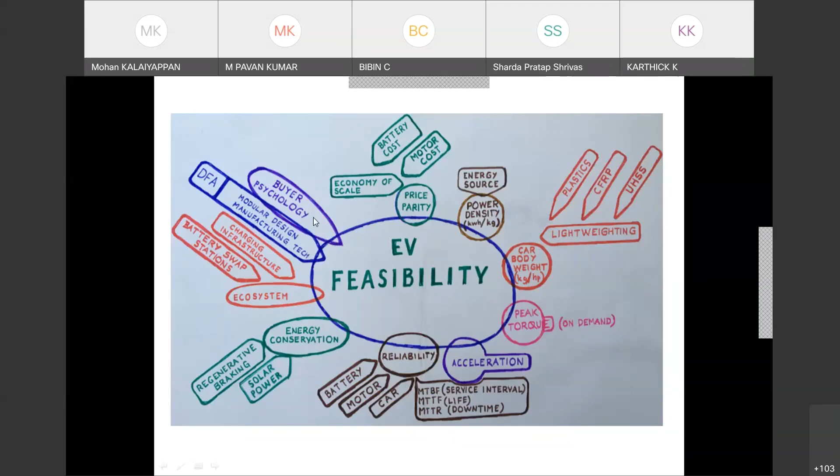Now, the challenges - what are the peculiarities of the Indian market? India is a highly cost-sensitive market, and for a consumer, fuel economy is very important since fuel prices are high throughout the world. Emission and safety norms are set by government, not by the consumer, and consumers generally do not bother about emission or safety.

Another peculiarity is the driving pattern - driving discipline, traffic jams, road conditions, and complex duty cycles. Even city roads have huge potholes and speed breakers. A huge speed breaker means you brake right in front of it, and most electric vehicles, like Reva, struggled to climb over them, sometimes even rolling backwards. This is one reason buyer psychology is still not in favor of electric vehicles.

Environmental conditions involve long sustained abusive usage, and overloading is very prominent and prevalent in India, even for passenger cars, auto rickshaws, and two-wheelers. Quite often two or three people will ride a single two-wheeler. There's also fuel adulteration, lack of standardized road infrastructure, and still no strong local manufacturing base for electric vehicles.

The relevance of technology to India is very important. So we will try to see how Six Sigma and reliability engineering concepts can be applied in developing electric vehicles - like regression modeling, one of the mathematical modeling techniques. It may be zero or one dimensional, but it's easy to understand for beginners.

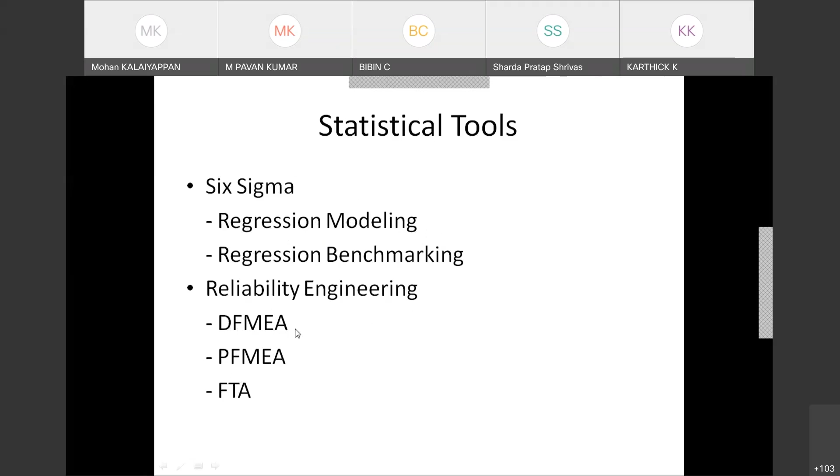We don't want to go into complex differential calculations, matrices, and determinants at a lower level, like that of a faculty member or even a junior faculty. They can easily understand regression modeling because it's just a two-dimensional graph. We'll also cover reliability engineering - DFMEA and PFMEA, that is design failure mode effects analysis and process failure mode effects analysis, and fault tree analysis.

Basically what the buyer aims for is low maintenance cost. Why low maintenance cost? An electric vehicle has very few parts compared to an IC engine vehicle, which gives it very good, very high reliability. Of course there are also fuel cost savings, other economic incentives from the government, and low noise. Now, how does fewer parts mean more reliability?

Suppose you assemble subsystems, electrical or mechanical, purely in series. If you have only 2 parts or blocks in series, the reliability is very high. Here component reliability is on the x-axis, and the ultimate system reliability, considering input to output in series, is shown - here it is 0.8 with just 2 components.

If you've got 20 parts, each subsystem with the same input reliability level of say 0.9, it comes down to less than 0.1. 0.1 is the reliability, that is complete car reliability, complete electrical subsystem reliability. It has got 20 parts in series for electrical or mechanical. This graph is both for electrical and mechanical. So there are 20 parts like gear, motor, belt, transmission, clutch, brake, final wheel. If it has got 20 elements each with 0.9 reliability, the overall drivetrain reliability, mechanical reliability comes to 0.1.

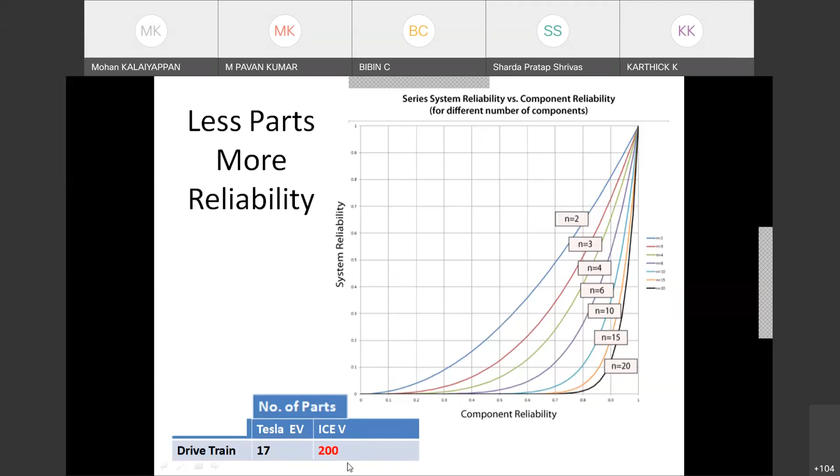So for the drivetrain, they're saying Tesla has got 17 parts. An IC engine vehicle of comparable capacity has got 200 parts. And that is why you combine, you consolidate parts, down to some 5-6 parts.

If you reduce the number of parts, the reliability of the system goes up. This is called parts consolidation. Mix all the elements and make it like a single replaceable part.

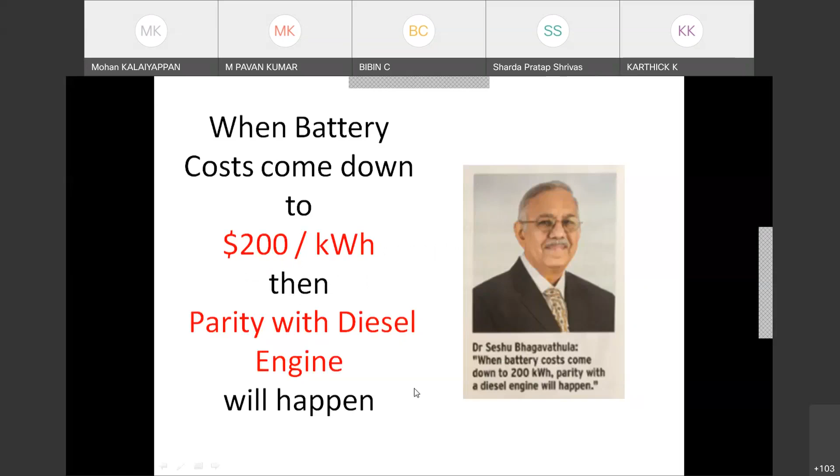Mission critical parameters are very critical. Key success parameter: some national experts, like Seshu Bhagavathula, say $200 per kilowatt hour is the benchmark. Battery cost should come down below that, then only people will be tempted to buy electric vehicles instead of diesel engines. Another expert from the government joint venture Energy Efficiency Services Limited, under Ministry of Power, Mr. N. Mohan, says when battery costs come down to $160 per kilowatt hour for a bike and $190 for a bus, then only those electric vehicles will become favorable and people will start buying.

So we'll go into what is a project definition. The project definition basically starts with the project charter, defining what your problem is. Whether you want to make some electric vehicle to run around your institute campus, or whether you are designing something for a commercial customer outside in a collaborative mode along with the R&D of that company like Tata Motors, Leyland, Hyundai, or Maruti. First of all, you have to select whether you want to make a two-wheeler, three-wheeler, or four-wheeler. So let us assume you have zeroed in on a four-wheeler.

So you have to write a spec book. That specification book is the first part of the project: product definition, pricing, and component subsystems, and availability of those subsystems in India. You cannot make all the systems by yourselves, you may have to buy a lot of things from others. So product benchmarking is very important, we will share all the slides. You compare the competitors' vehicles, go for regression benchmarking. Supposing you want to copy some imported design, that's possible, but it is subject to intellectual property rights infringement.

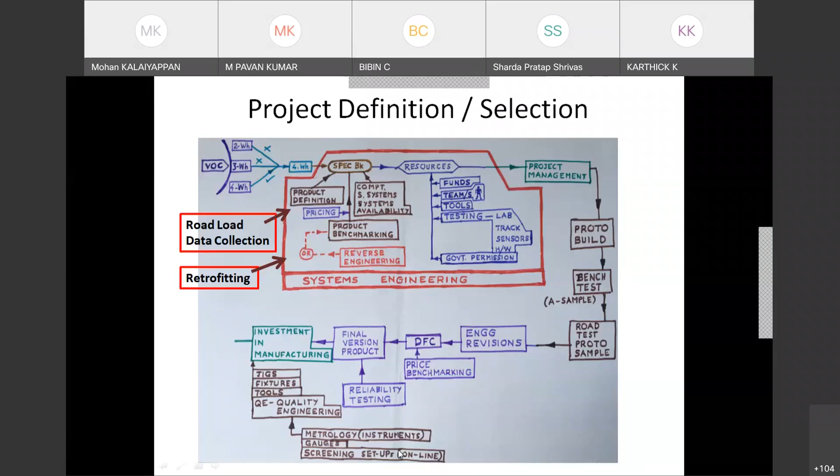And the price benchmarking is done here as an additional design for cost. And final version of the product, investment in manufacturing like jigs and fixtures, tools, quality engineering, that is metrology, gauges, screening setups, that is online screening tests. So we go through waterfall.

And benchmarking. Benchmarking basically is collecting data from competition, market data. You can benchmark against some equivalent IC engine also, equivalent IC engine of the same kilowatt or horsepower capacity. And prototype building, testing, engineering revisions, product release, feedback, incorporation. We have already discussed that.

Okay, so first of all, you collect the user requirements like market survey, urban drive cycle data collection. That is, basically you fit some load sensors and vibration sensors, collect the data. If you cannot collect the data, you can buy the data by paying to organizations like ARAI. If you say that I want Mumbai or Pune drive duty cycle, they will give you, but at a price.

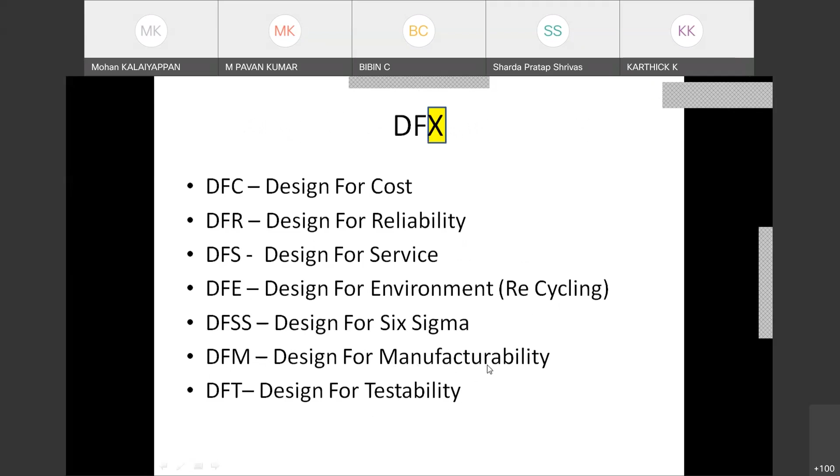Okay, so what is the connection between APQP and systems engineering? APQP, as you all know, maybe you might have been exposed to QS 9000. It's also known as IATF, all these things, AIAG, VDA, there's a German Automotive Industry Association. There is nothing but the parallel of systems engineering followed by entities like NASA, Boeing, Airbus, Honeywell, Raytheon.

So like fault tree analysis. Basically, it's a quantitative approach. We will be following design failure mode effects analysis, which is a qualitative approach. In fault tree analysis, insufficient fuel in a car, they say that AND and OR gates, fuel used at 0.2 probability and no fuel from tank at 0.02 probability. Ultimately, it works out to insufficient fuel will happen 0.032 out of 1, that is 3%. 3% of the times insufficient fuel can happen. This is normally fault tree analysis used as a post-accident or post-event analysis, not useful as a DFMEA.

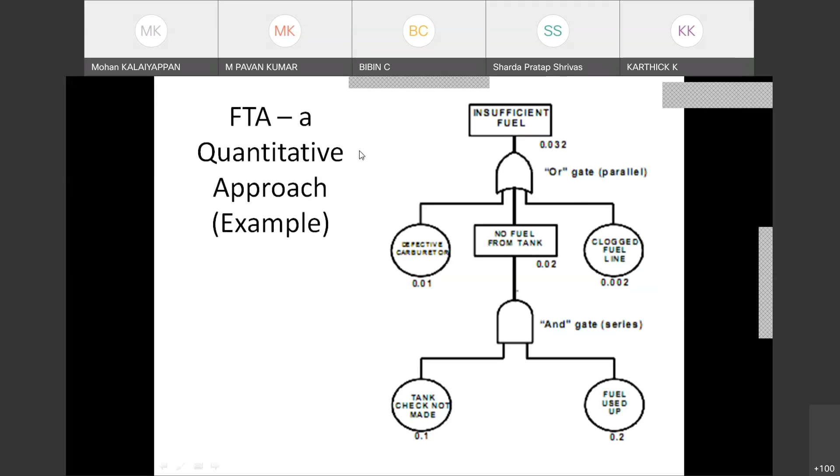So it happened in the Boeing 787 Dreamliner - a lithium-ion battery supplied by GS Yuasa, Japan, really exploded in mid-flight. They grounded all the aircraft and did a fault tree analysis.

Suppose you are a lithium-ion battery manufacturer - this GS Yuasa case applies to automotive companies also. They could learn from the failure of the aircraft application. There was insufficient cooling while discharging, it got overheated, and then it blew up. They learned from that failure.

Boeing 787 Dreamliner GS Yuasa battery failure - this is what I mentioned. They predicted 1 in 10 million flight hours for one failure, but actually 2 episodes happened in 52,000 flight hours. So they had to ground everything. This is the problem - even in the US, when they calculate reliability, they made such a serious mistake.

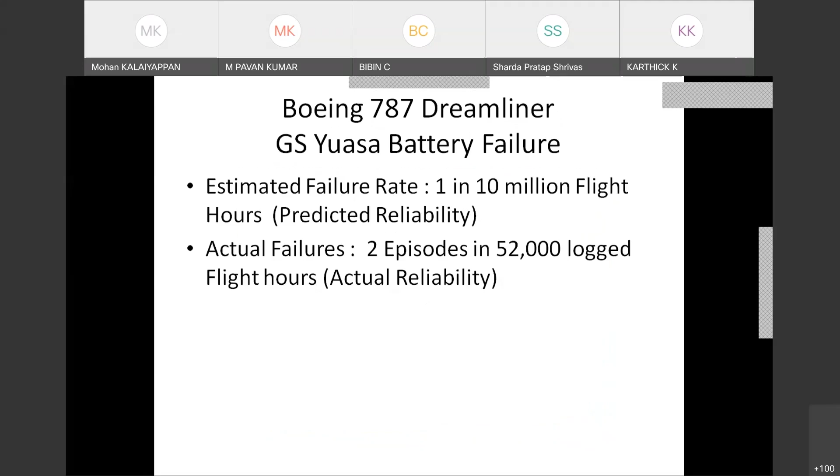Design for reliability happens at various stages - concept phase, design phase, development phase. You have FMEA here, fault tree analysis will come here, and somewhere here as failure analysis. FTA is one of the failure analysis methods, and various other things are there. Each stage has to give feedback to the previous stage - that is how it slowly builds into a good product.

Fault tree analysis versus FMEA - as I said, FTA is a post-accident investigation, while FMEA is done before the product design. So FMEA is called proactive, preemptive, and preventive.

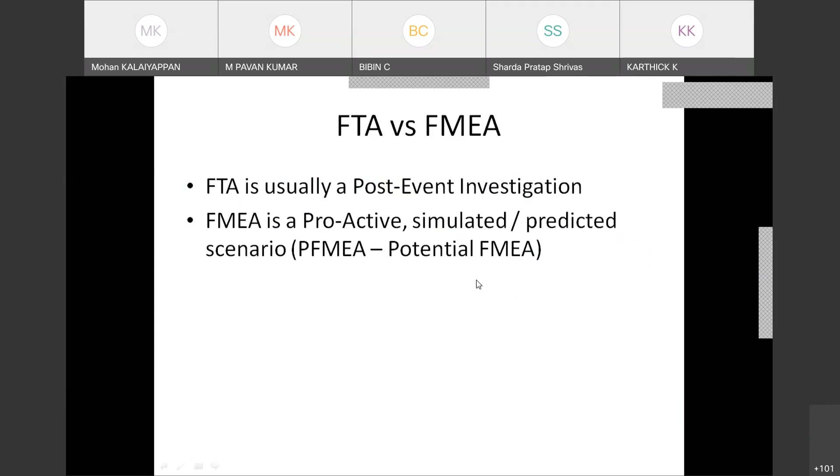Systems engineering approach - we're showing an example from AVL Germany, a subsystem manufacturer. It worked along with another company to manufacture a range-extended electric vehicle. Basically it's an electric car with a range extender like this, using a Wankel engine, which is an IC engine, running on methanol or some fuel.

I'll see the details in the later specification sheet. It's not on a crankshaft, it's a straight drive shaft. This engine runs the generator, and there is a battery pack here - used for range extension. This is the range extender concept they decided on, and they made some prototype vehicles; it is now mass produced.

For that they used the waterfall diagram - I think we're all familiar with the V-type model: target definition, concept, powertrain design, component design. At each stage, feedback flows back to the left side - system level, component level, and then back to system level again.

Yesterday we talked about 0D, then going into 1D, 2D, then coming back again to 0D and all that. So: component test, realization, implementation, component test, powertrain test, in-vehicle test, and fleet test. We'll have to do it like that.

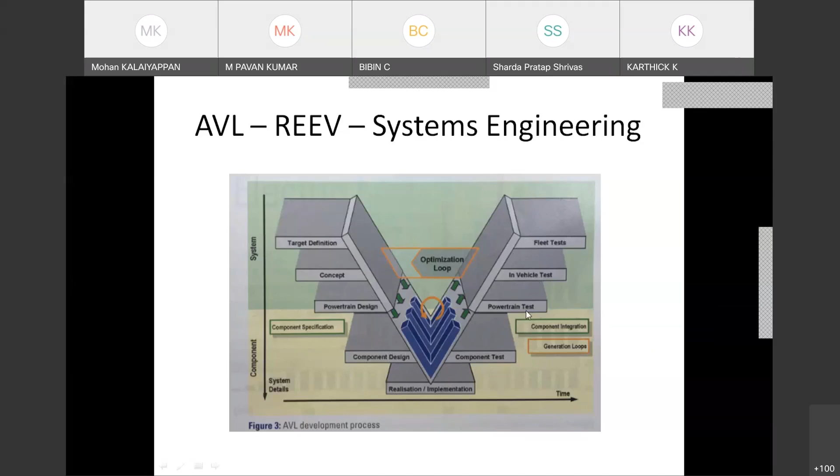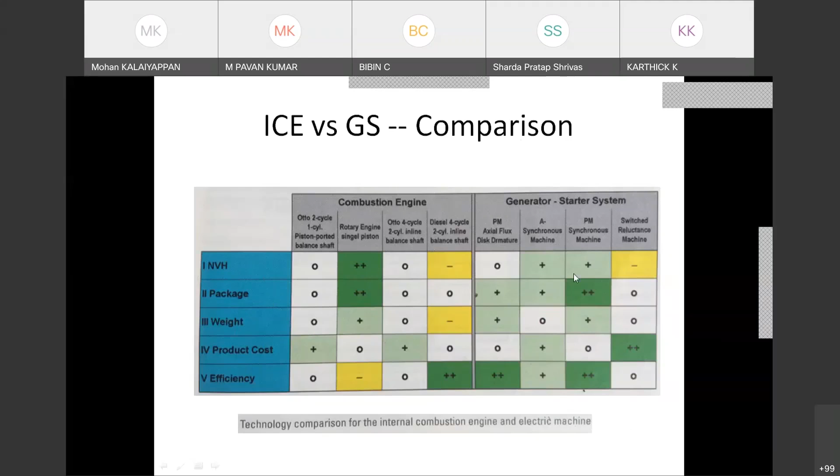They also compared the internal combustion engine and generator starter - they call it a generator starter system, with an NVH package and so on. They found ultimately that this kind of configuration is good - that is, the permanent magnet synchronous machine. This is how they collected statistical data.

How many persons did they collect data from? A lot of citizens, the driving public. They collected it and found it's a truncated normal distribution. They found that more than 70% of vehicles do not exceed 50 kilometers per day of travel - that is, per day the vehicle doesn't travel beyond 50 kilometers for more than 70% of the time.

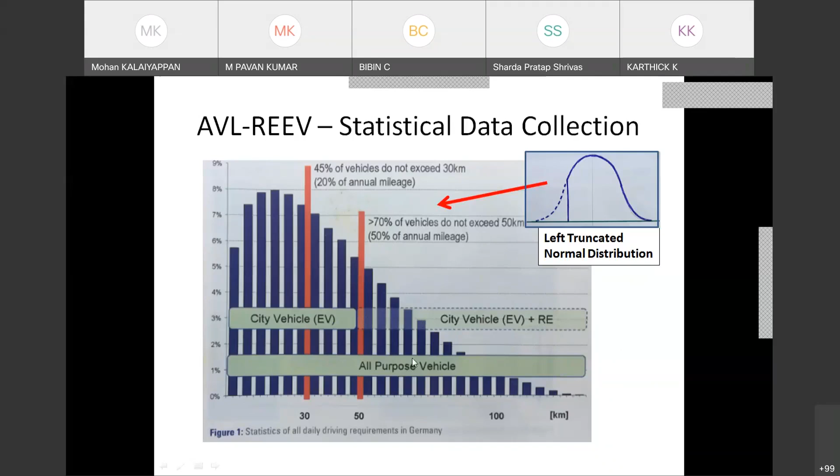Maybe for the whole year, so many specimens - persons, human beings - were sampled and analyzed. This is one of the very interesting applications of starting from statistical methodology rather than from any feelings or experts' inputs. So for city vehicles, an electric vehicle beyond 50 kilometers should use a range extender - very nicely they concluded this.

So for city drive, you'll have to collect this data - I think these are available from European governments who give the cycle itself. They collected statistical data and are saying that any electric vehicle should follow this. SAE also has given a standard driving cycle - accelerate, cruise, decelerate, stop for some time, and so on.

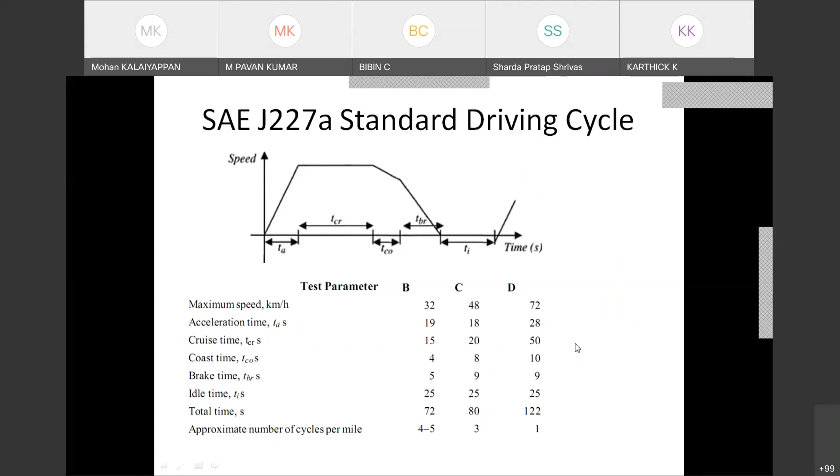City, non-city, various variable route, urban, variable route, suburban, like ABC, so many things are available. What is BCD and all is here. Yeah, BCD, there is no A here, there are BCD.

You can see all that leisurely, they have taken a government bus, city bus, traveling through Florence city, I think it's in Italy. They have collected GPS data, and at each point, what was the bus doing, what was the acceleration, deceleration.

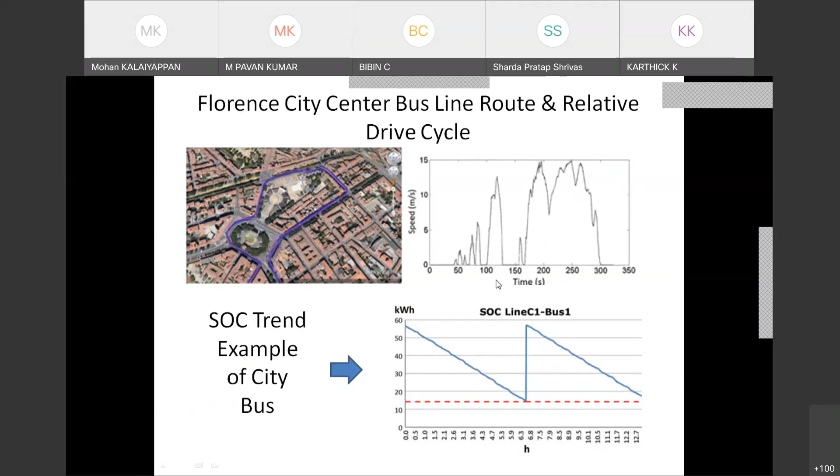State of charge trend, they correlated perfectly, and this is how they go about. There is a data logger in the vehicle itself. It is used in a Canadian city. Daily utilization, running, bulk charge, opportunity charge. Opportunity charge is something different. When it is actually idling, waiting for passengers, it is able to generate through inductive charging or something, it's called opportunity charge. This was made by Mitsubishi i-MiEV. It's a car.

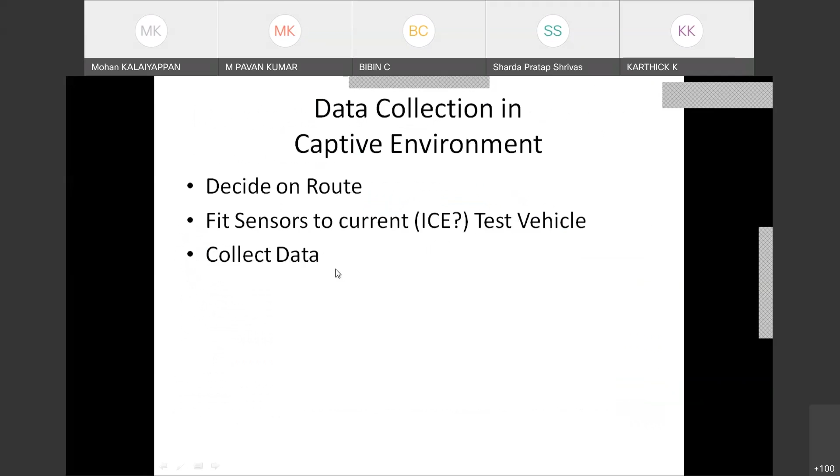Okay, so decide on the route and fit sensors on current IC engine vehicles. Basically, you can collect the load, shock data, vibration. For an IC engine vehicle, maybe it can collect data if you decide to use your campus road internally. Also, you can do that, and basically you collect range, mean speed, torque, what is the torque requirement. There are torque sensors available, torque data also can be collected. Stop, start cycles, all that.

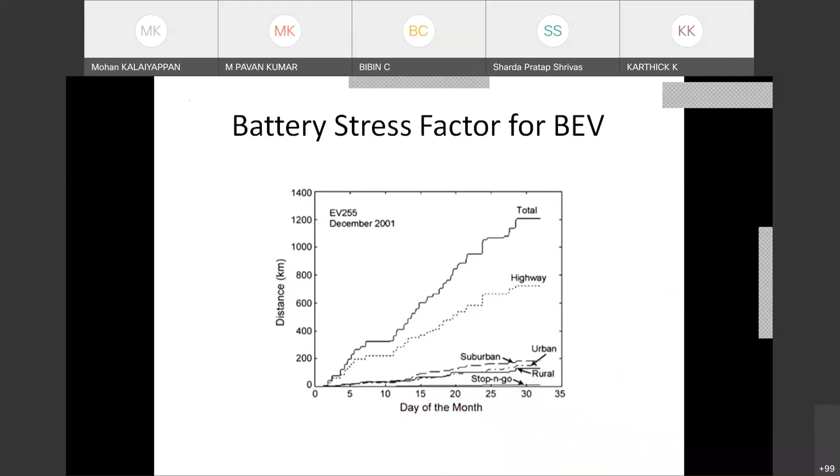So you'll have to do it for current IC engine vehicles or electric vehicles, whichever, some 5-6 vehicles, successful vehicles are available in India, they are being accepted by the market. Then you can plot them. For 5-6 points, it will be a very weak regression, but still it's better than nothing. It's a starting point. So these are all the data for that.

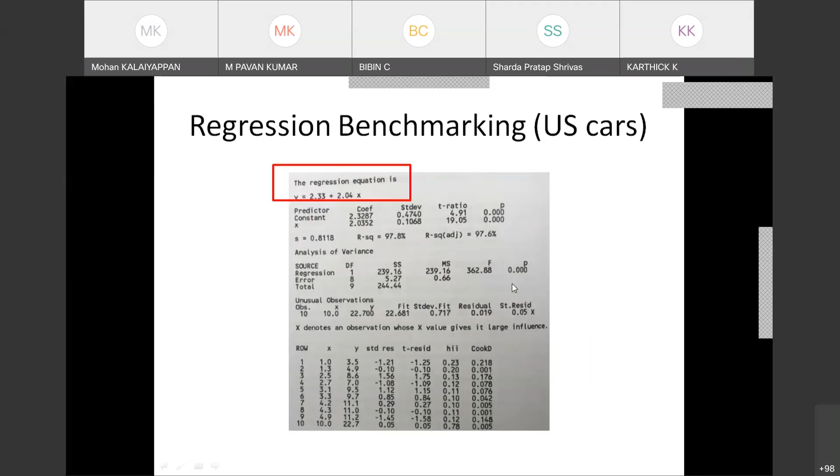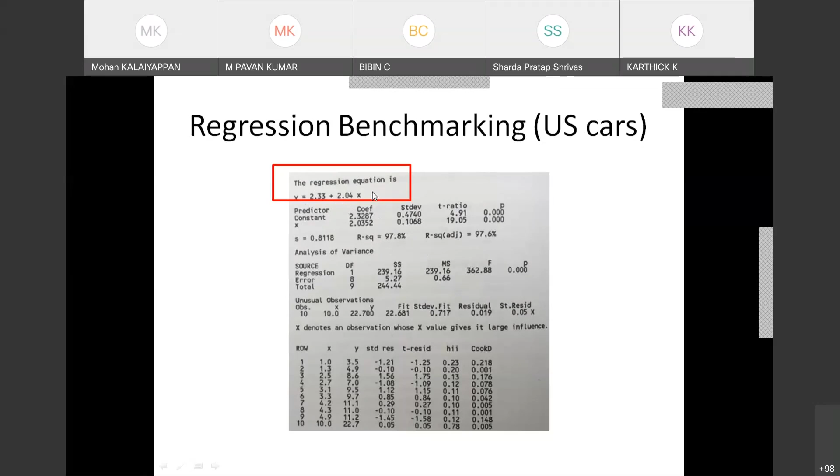And they obtained this regression equation. Y is equal to 2.33. That is, Y means miles per gallon is equal to 2.33 plus 2.04 into the vehicle weight. So they got it as a very simple regression, I think it was 97.8% confidence level for this. So good. If you have Minitab, MS Excel, or some equivalent software, you can run that and get it.

So we'll not go into this because they benchmark various things: weight, displacement, cubic capacity, number of cylinders, horsepower, transmission size, number of gears, various things were benchmarked, and this is what they got. Basically, it's called a multivariate chart. You can take any X or Y here, you can find out that graph.

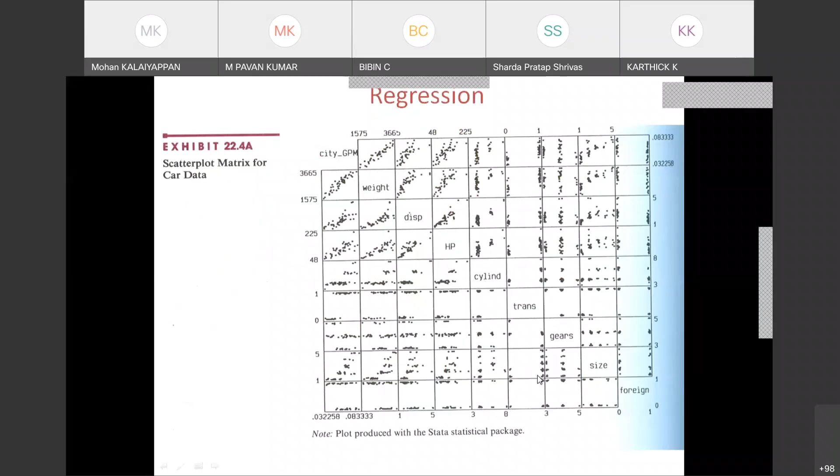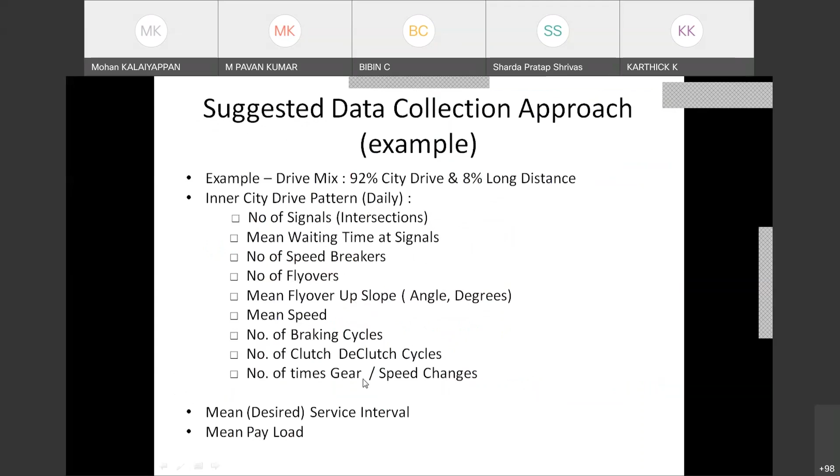And motor characterization you have to do for the particular motor you have selected from a supplier. And torque characteristics at various slopes, because every city has got flyovers now, 7.6% slope, 3.8% slope. Sometimes they would have exceeded the National Highway Authority specified slope also. Yeah, and Six Sigma says, for diesel engine it is like this, for electric motor it is like this. For diesel engine,

Basically, I think I'll put it in vibratory mode. You may not hear. Okay.

Six Sigma experts say you should select the useful range in a reasonably flat portion of the curve. But there is no reasonably flat portion in the electric motor. Doesn't matter, we'll have to select somewhere here, not here, because it seems to be coming down very steeply. So you should select somewhere here.

So all these are very required - electric motor, IC engine characteristics, and the system block diagram. You'll have to have a structure or functional block diagram or boundary diagram. So you have to start with that.

This is a general boundary diagram or block diagram for an electric vehicle system. Interestingly, the Audi e-tron has a parallel drive. The IC engine at the front axle drives the front axle, and once the IC engine runs out of fuel, probably they will use it as an electric vehicle, and you can use it vice versa also. The electric motor is at the rear axle driving the two wheels. It's a completely parallel system, so it's called a parallel drive architecture. So you can develop any architecture which is suitable for you.

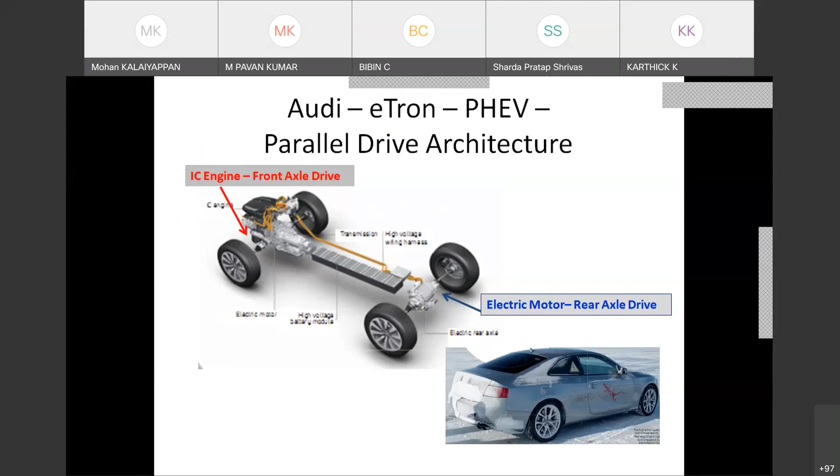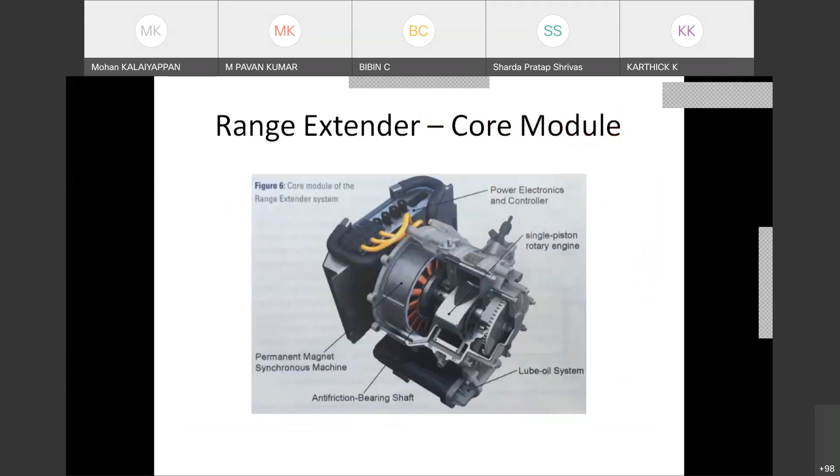They did finite element analysis, and there's a functional block diagram. Once this range extender is switched on, this functional block diagram opens, and the range extender has start, run, stop, off, various modes. So you should be able to give a high level functional block diagram. If you have to design something, you should be able to make a functional block diagram, or what is called a structural diagram, or boundary diagram.

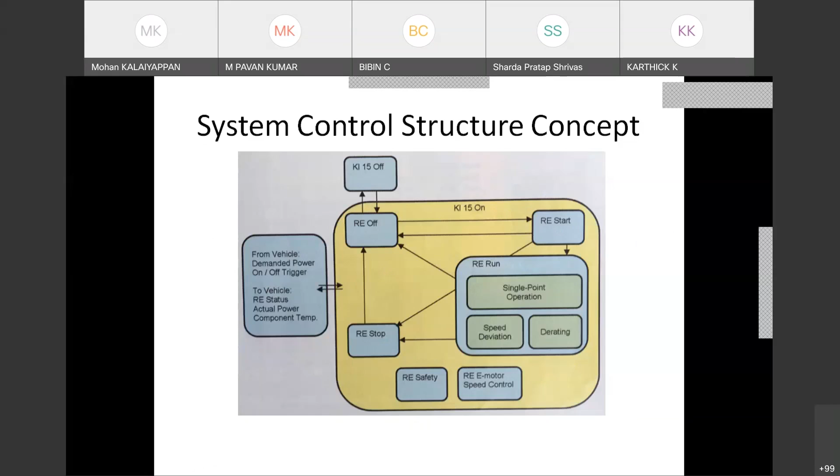The DFMEA calls it a boundary diagram. There are modular designs - you can extend it by adding one more assembly, and the axle, the center shaft will become longer. It's very interesting, the Germans are very fond of such over engineering, they have made it highly scalable. For higher kilowatt, you have to add one more sub-assembly here, like a hydraulic power pack, hydraulic pressure pumps - you can add something like a Parker pump. They have made it so modularity in design is very important, then you can scale up. Scalability will always be there.

QFD - quality function deployment, DFMEA, PFMEA, FTA, digital twin - all these are very important. In the concept design stage there's FMEA, in the development stage there's FMEA, design of experiments, and in the process FMEA you have to do it when you manufacture or when in an assembly shop. You do process FMEA and process capability studies like statistical process control, CP, CPK, all you have to do.

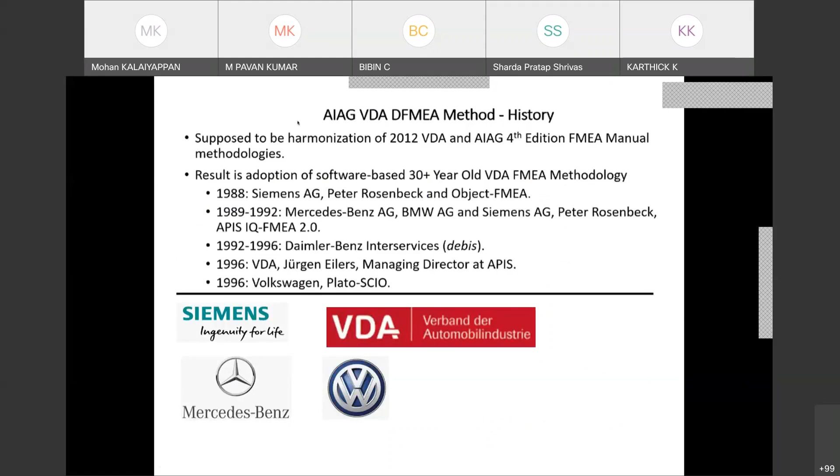This is the AIAG VDA handbook - the German Automotive Industry Association and the American Automotive Department made it. Siemens, Mercedes-Benz, these are all contributory authors of that, along with Volkswagen - the best practices of these companies have gone into making this.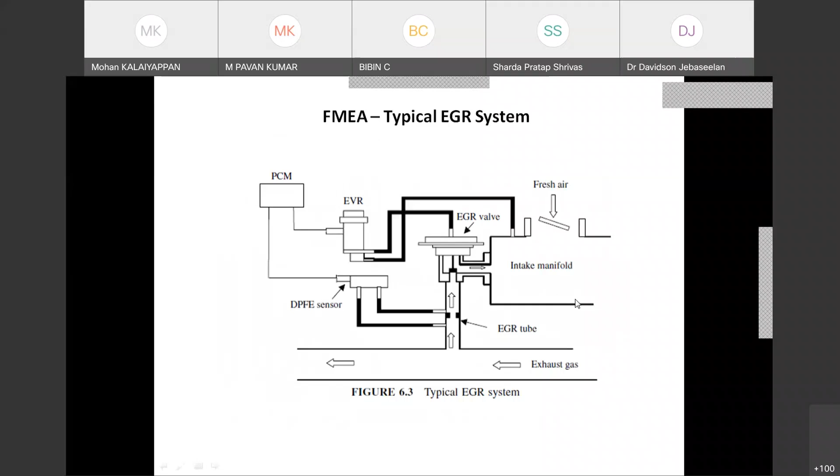So you should be capable of making such schematic diagrams showing the interactions between various sub-assemblies and sub-elements. It is an exhaust gas recirculation system as an example - that is an FMEA example. And the fault tree analysis here is a cause and effect tree for a lighting failure, showing how the light fails in the car. Probably you can go through it in depth later. There's a fishbone diagram also, another methodology.

Tesla digital twin - for every car produced in the production line, they have a digital twin, so they will be able to analyze it later on. If there's a problem reported from the market, they can see what were all the problems during the manufacture of that particular vehicle. For every vehicle identification number, there is a digital twin file available in the Tesla factory.

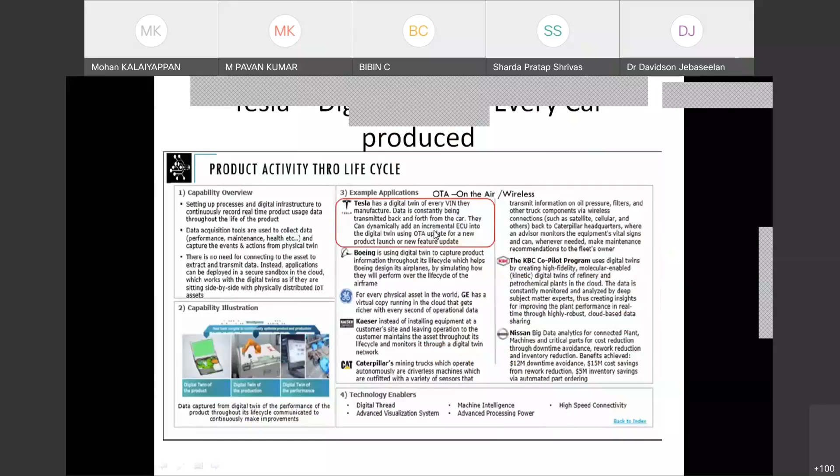Basically, this is a pragmatic approach. What is a pragmatic approach?

You do some classical hand calculations also, design from first principles, and computer design and simulation you can do as a digital mockup. All people are very fond of doing this, but you should not forget the importance of classical hand calculations. Before computers came, before all these advancements in software came, what did we do?

That is very important. If you don't cross-check at every stage, you will go completely wrong. Any FEA or CFD should also have some rough calculations. If your result is not matching with the CFD or FEA, there is something totally wrong. Probably you have added two more decimals, or selected something wrongly among the many drop-down menus. So this is very important.

Whenever you do some engineering analysis, you should validate or calibrate that analysis with a problem for which you already know both input and output. Using the same thing, if your hand calculation matches, then that methodology is correct for advanced complex analysis. Benchmarking and regression is also an example. Design from first principles and benchmarking using regression, and when CAD/CAM results all come very close to the same result, that means you are correct. If somewhere something doesn't match, then there is something wrong somewhere. Basically, that's why they say physical evaluation is the root of numerical evaluation.

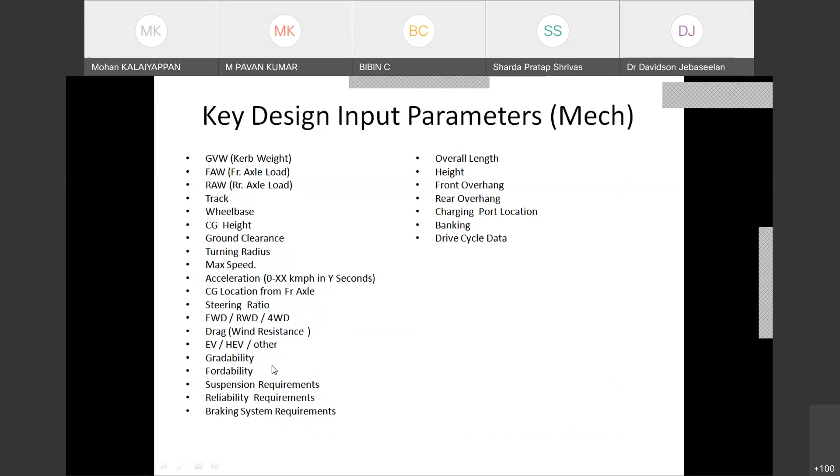So design input parameters - you have curb weight. All mechanical engineers are aware of what all are there in an automobile. The four mechanical parameters mainly are gradability and fordability. Gradability is the slope on which your vehicle can climb, and fordability is the depth in water where the vehicle can go without problem. These are very important. Even drag and wind resistance, everything is there.

So kilowatts, battery chemistry, range per charge - these are all mean charge, discharge, cycles to failure. This is very interesting reliability terminology. What is the braking system, battery swap option, charging plug standards. Charging can be plugged in with wire or without wire, that is inductive. Charging plug standards like CHAdeMO or whatever - all these have to be defined.

Then there's the P diagram, called a parameter diagram. In the vehicle steering system, it's a parameter diagram - input, output; basically input is here, output is here. The process or product - it can be used for both process as well as product design. So what are the design parameters? Like kilowatt, RPM, whatever you are designing for - these are all design parameters known to the designer and inputted into the product as a factor, called design parameters.

What are noise factors? Environmental factors - somebody misuses it. You have designed it for some 10-degree slope, somebody is using it at a 35-degree slope, trying to make the car go in that. So these are all noise factors. There's vibration, shock load, potholes - these are all noise factors.

So input - basically some energy is input, battery energy or something is put inside. So what are the inputs and signals, and what are the noises? Signal to noise ratio - this is for designing an automotive steering system. Sometimes the vehicle tries to move sideways, it's called lateral acceleration. That is a noise output, an undesired output. So how to control that? That should be within controllable limits. So this is a P diagram.

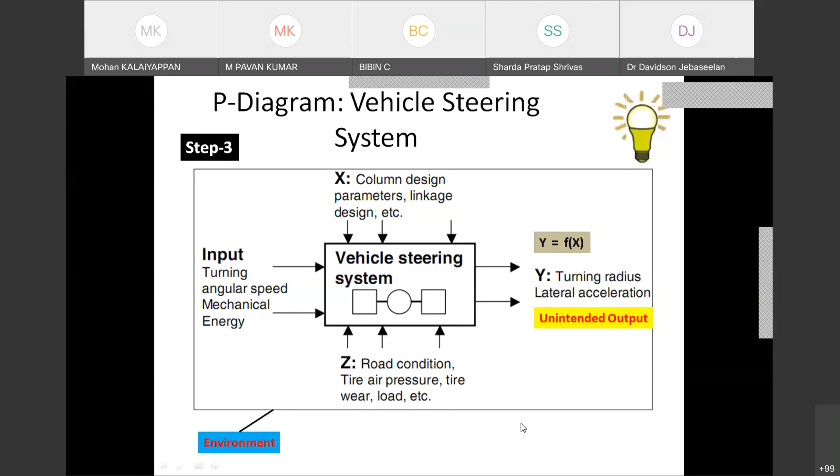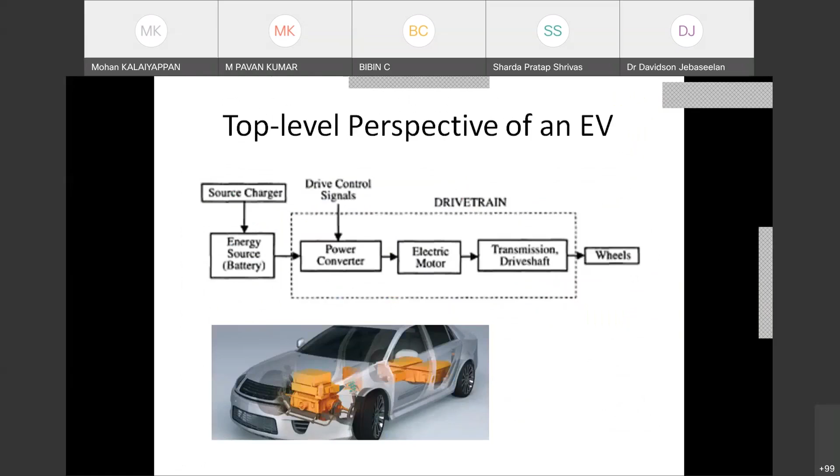Right, so this is the equivalent diagram. You can see this if you download that VDA FMEA handbook. We don't have time to cover it fully, but this is a functional block diagram, top level perspective, where you decide basically a range per charge.

You decide power, torque, charging time, cooling media. If the battery system is cooled, sometimes the gearbox also may be cooled, so you have to decide all that. What is the time required to service, how many hours per week or per month? You have to design, define, and meet it. And price, design for cost, range per charge, torque, speed characteristics, overnight charge, whether infrastructure is available, battery voltage, current is available at that voltage throughout the night, service interval, seating capacity.

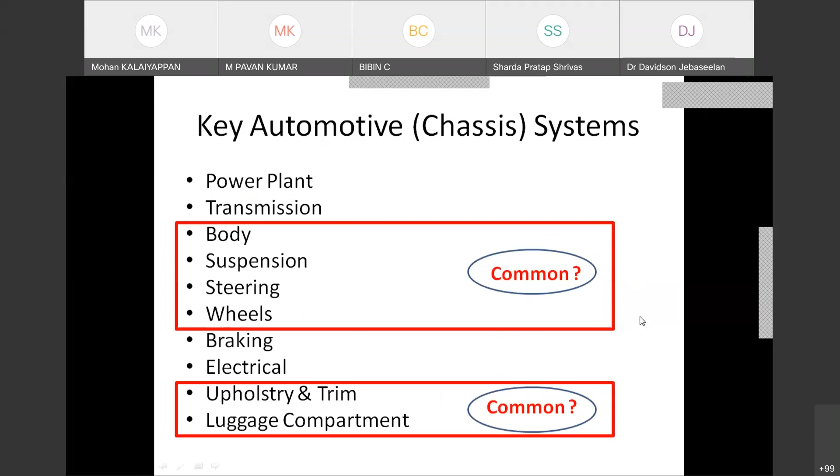Automotive chassis systems are common with current IC engines, so you can borrow from them, you can use them. You can even retrofit some available vehicle if your budget is very small.

Mean time to failure is for non-repairable, single-use items like bulbs, clutch plates, or shock absorbers, which have to be thrown away, for which you'll have to buy a new item. Non-repairable items like disc brake pads use mean time to failure. Repairable items like engines use mean time between failures. And mean time to repair, that is the service duration, the downtime, the non-value adding activity.

So modular design is very important. Yesterday Professor Josephine talked about mass customization. Each vehicle sold to a customer will have some features different from what was sold to everybody else before. So if you make it modular design, frequent engineering revisions become friendly, and loss of reliability has to be addressed. Of course, when you split up into many parts instead of reducing the number of parts, reliability gets affected, but that we can overcome.

Modular design is also standardization friendly. You can incorporate supplier standards, one particular module standard, into your overall design. It facilitates common suppliers. Some supplier may be supplying something to your competitors also, so you can accommodate that, there is no problem. Only modular design permits all that.

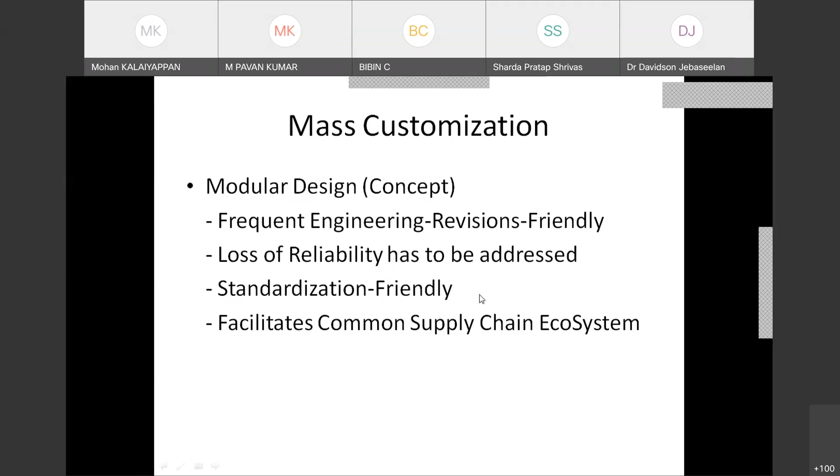And you have lightweighting, metal to plastic. That is, convert the metal part to plastic, or replace steel by aluminum, or give some ribbing in aluminum die casting, or steel die casting, steel gravity casting. Give a lot of ribs so that you can reduce the wall thickness.

Systems engineering is also one of the methods for lightweighting. You can reduce the number of parts, and you can also think about where to reduce the weight, by addressing it in the earliest part of the project through systems engineering.

High performance engineering plastics - they have given some turbocharger intake manifold withstanding up to 220 degrees centigrade. They have kept it on a grill, a barbecue grill, and tested it. So it replaces aluminum and steel. It's basically a plastic supplied by a company called DSM.

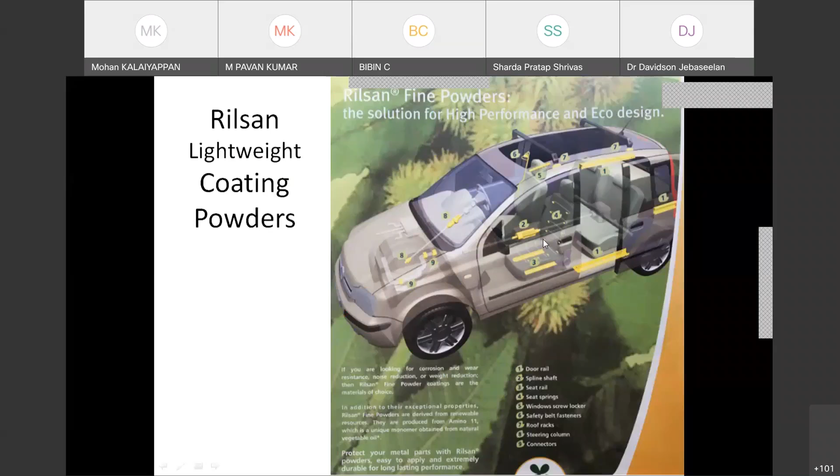There is another company called Rilsan. Rilsan supplies powder coating materials which are lighter. Those powders are lighter, so it's basically reducing the weight of the vehicle by some amount.

Mann and Hummel is a famous company which created a very high temperature plastic which can be used in engine intake manifolds, possible to be fitted on a hot IC engine. This was developed around 1995 by this German company. They found a plastic intake manifold which was fitted on IC engines in Germany on a test basis at that time, around the 1990s.

You can see the slides later. When you go for weight reduction, you can go for ribbing, reducing the wall thickness for a geared motor die in aluminum die casting. There are hexagon type ribs, each about 3 millimeters high. They changed it into square ribs with micro ribs, where the square rib height was only 1.5.

The micro rib height was 0.5 to 0.75, and they found a lot of weight saving was there. So this kind of ideas are there.

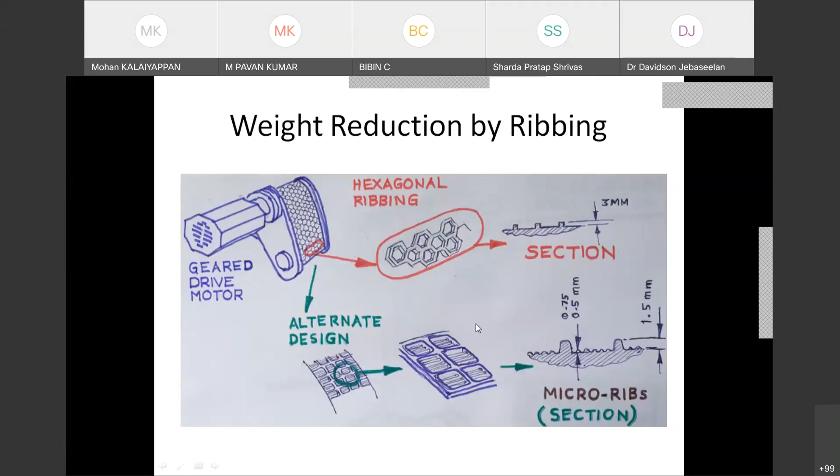And generative design by parametric technology, Creo 7.0, is like thermocol, cellular structure, rib structure. Basically it is following what's called topology optimized design. It is trying to generate the idea like artificial intelligence, using artificial intelligence, how bones evolve in living beings, structural skeletal bones. Same method for the given weight, what is the strength required, what is the minimum possible weight? It generates automatically.

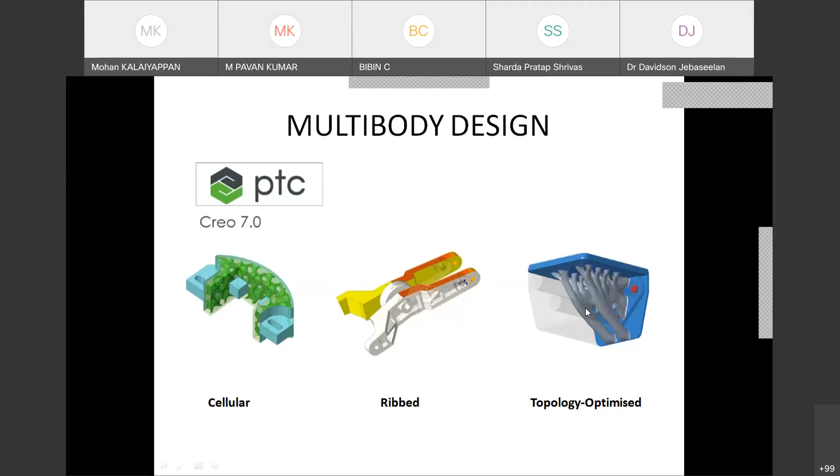It can be manufactured only using 3D printing. There is no other method possible. Even injection molding or die casting for non-ferrous alloys is not possible.

So this is a close-up of that. It's called biomimicry. This computer algorithm automatically does it. And these are some parts.

Now you can see in aircrafts and all, some brackets are already like this. The honeycomb also is a biomimicry. Honeycomb panels are used in aircrafts.

And this is Altair Inspire Print 3D, that is one of the software. If the students learn this, they have a very good scope in 3D printing companies.

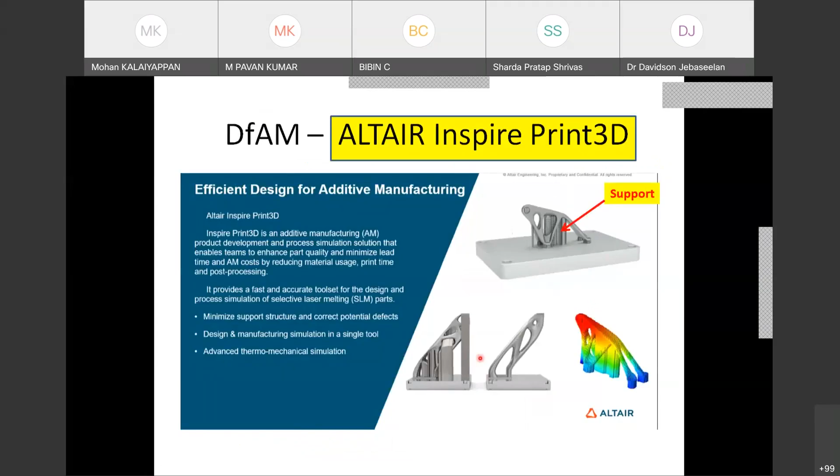This is one of the brackets manufactured using topology optimization. That's what you see here, all support structure. In 3D printing, metal 3D printing, it will sag during hot state, so some support structure, removable support structure also has to be designed and printed. This has to be removed by machining and other methods.

So they use Six Sigma analytics techniques, design of experiments for 3D printing techniques. GE uses that. It's one of the heat exchangers using, they have a lot of cooling fins. You can see the very revolutionarily different cooling fins. Air will flow through this, and it's 17-4 precipitation hardenable steel.

It's a stainless steel, and this is a heat exchanger input and output. And there are two plates. The heat exchanger is inside, but there are a lot of cooling fins, which is entirely different. The shape is revolutionarily different design.

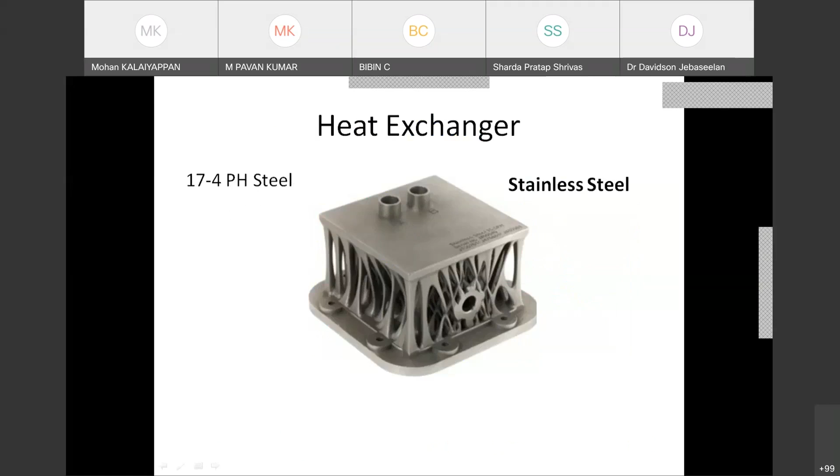And aircraft brackets are already topology optimized. This is here a 2.6 kg original machined bracket reduced to 0.766 kg by 3D printing using metal 3D printing using topology optimization, and a jet engine nozzle, GE jet engine nozzle.

About 2,000 per month were being supplied before the pandemic. This is a very hot and critical zone of the GE manufactured jet engine, aircraft jet engine.

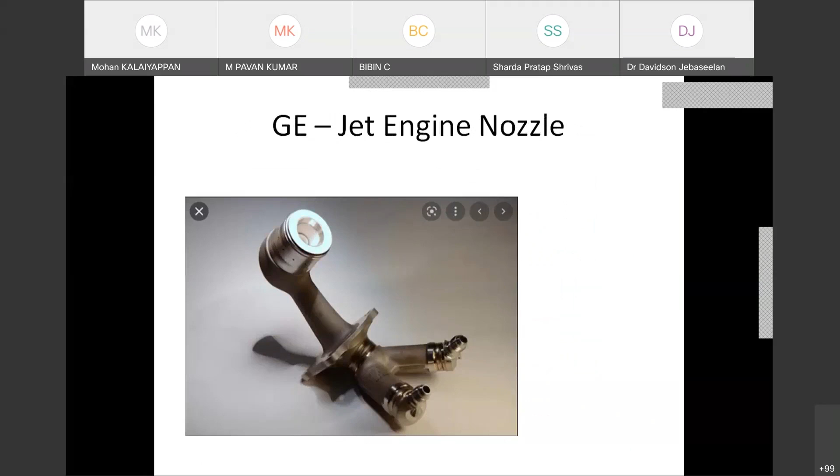And they're saying lighter parts will help; electric vehicle, additive manufacturing is going to help the electric vehicle industry by these kind of factors. Battery life will be extended, and organic geometries - that's what I mentioned as biomimicry - give the highest possible strength to weight ratio, going very close to natural objects like bamboo, human bone and all that. Parts consolidation: number of parts can be reduced.

Widest material choices. In 3D printing now, a lot of materials are available: plastics, elastomers, ceramics, composites, metals, a lot of things are there, without compromising strength.

Additively manufactured battery enclosures, flame retardant polyamides - it's nylon, which is called polyamide. They regulate the running charging temperature to 25 degrees, and while parking it will be 10 degrees, different temperature.

Better value in low volume production with quicker time to market. With additive 3D printing you can do it very fast. It does not have a tool development time or die development time running into several months. But of course, it's very costly.

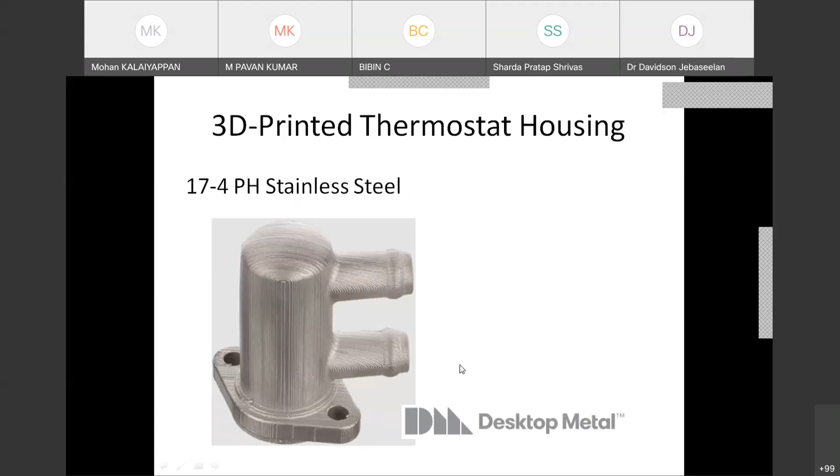The spare parts and digital warehouse management will become easy with 3D printing. So this is a 3D printed thermostat housing, and this is a copper heat sink, which will be useful for electric vehicles; any circuitry on the PCB itself, you can mount it.

And these are materials available: Inconel, copper, H13 tool steels. These are some composite materials: onyx, carbon fiber, high strength, high temperature fiberglass. These are some intake manifolds made with Ultem.

There are some parts, and within the wall thickness itself, in an assembly housing, in a casting or something, within the outer wall and inner wall, there is a lot of pores. This is called a lattice structure, and this is possible only with 3D printing.

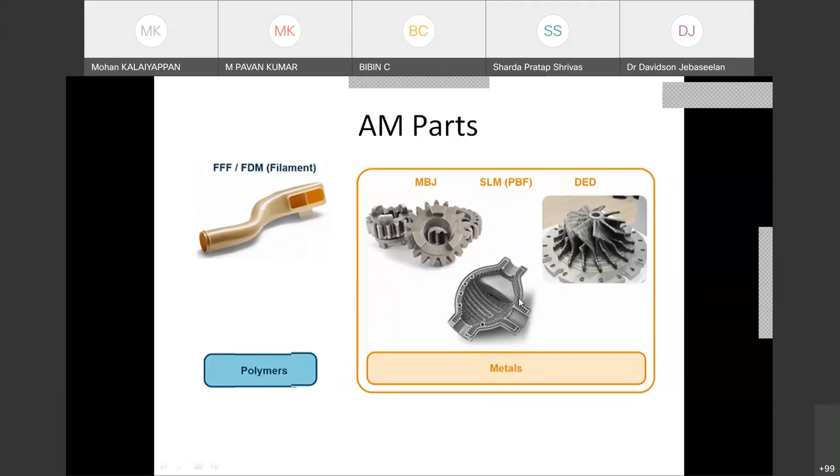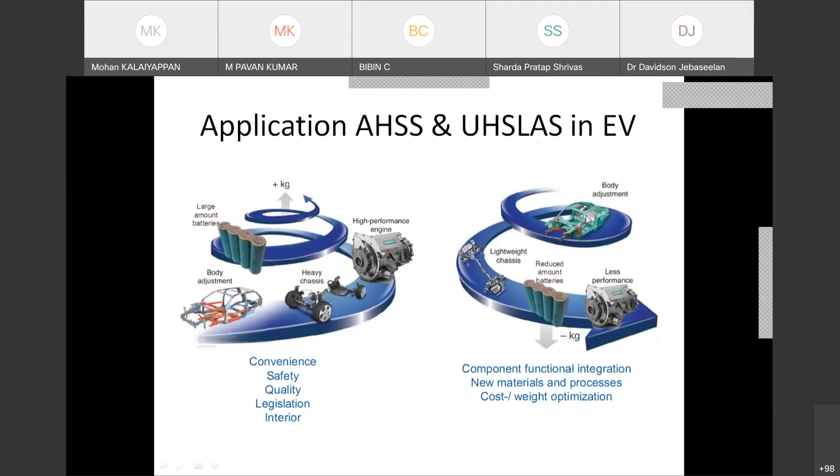And advanced high strength steel, and ultra high strength and low alloy steels - this is what they're saying, that if you add it in the conventional way, the weight keeps going up. So you come through using advanced high strength steels and ultra high strength low alloy steels, you basically reduce the weight of the car. These are some of the steels: dual phase, transformation induced plasticity steel, twinning induced plasticity steel, complex phase, mild steel.

Mild steel is used for comparison, and it's also used in the current car. And this is basically an electric vehicle.

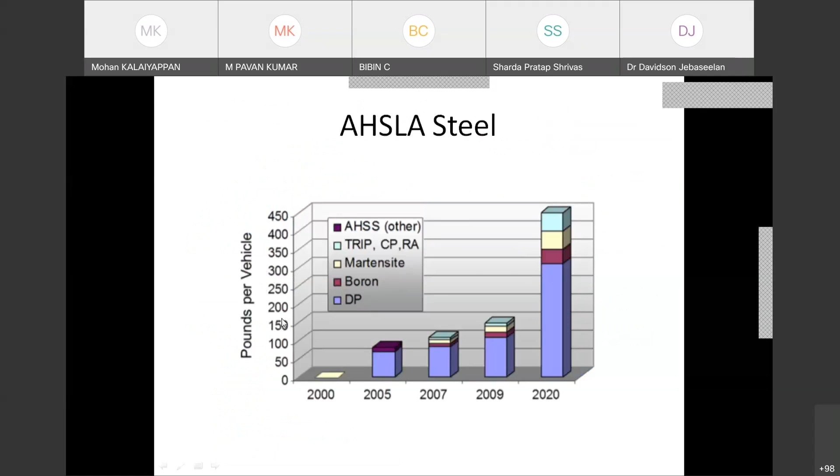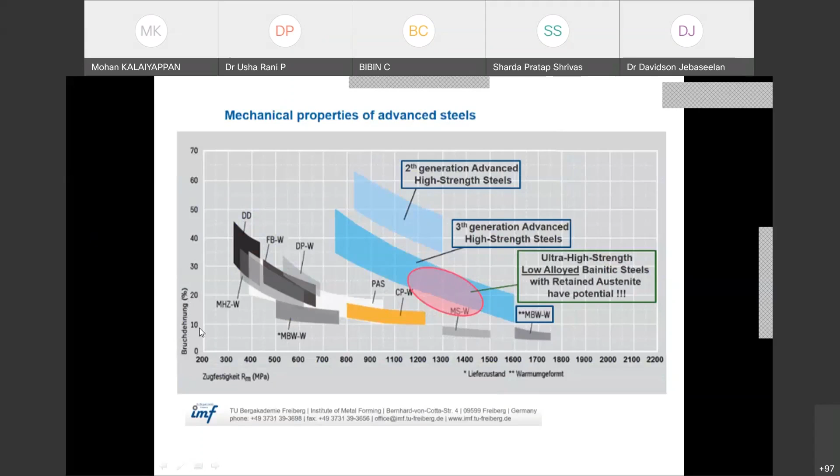There's one more graph. Here also you find this is the zone of interest - ultra high strength steel mechanical properties. As usual, the y-axis is elongation, written in German. Here also UTS is written in German.

We need not worry about water going inside and all - what is the probability of water getting inside and damaging the whole hub? Or even for that matter, for floor body battery vehicles, most vehicles keep the center of gravity low with the entire battery in the floor - even Mahindra, Tata, Nexon, everywhere it's in the floor. So in Bangalore and all, we find flooding is very common. Flooding has become very common in all global cities now.

But what is the probability it can happen? It doesn't happen throughout the year, it doesn't happen every week. So you will have to design like that. Even then, you can have vents kept at height - vent pipes at a much higher height. So what is the probability of it happening? You can still go ahead with that if you know the probability level.

This is what happened when we developed the Daimler truck, a 7.5 ton truck. They know danger is there, but they know the probability of that happening is very remote, and there's no other option, so you have to do that. For that, you have to use a probabilistic design approach.

So you have to collect data - how many times in Bangalore, you have to go and collect data on how many times water logging happened, what are the depths of the water logging. Maybe you can collect other things like flyovers, what are the flyover slopes. If you collect all that and process it statistically, then you can say the probability of encountering that situation is only this much. So you can design for that.

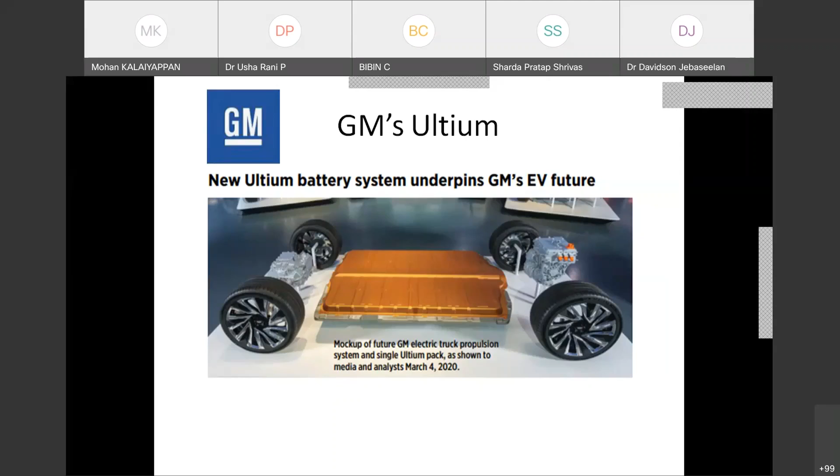So electric vehicle, electric ecosystem - all these things: software, user desires, manufacturing. Of course, India has been ahead. Possible roles for Indian engineers - India is becoming a global R&D hub.

Value engineering - we can do frugal engineering, lean ideas, lean product design idea, innovation and TRIZ, appropriate technology. Some third world countries are similar to India: Brazil, Mexico, Vietnam, Sri Lanka, Pakistan, Nepal. All these countries have similar traffic, travel, user psychology. So you can modify whatever electric vehicle is designed by some German or American company. That wealth of knowledge is available only in India.

And systems engineering, industrialization, design for manufacturability or design for assembly, jigs and fixtures, quality management systems, software development. There are millions and millions of lines of code in every car now.

Global manufacturing hub - again, we can become even a retrofitting hub for the whole world. There are a lot of old used vehicles. Why waste the frames? Government is thinking of scrapping them, but probably government can rethink and test the mechanical strength of the bodies and say this is useful for retrofitting. This can be recycled as a retrofitted electric vehicle. This needs skills, and it creates a lot of job opportunities for engineers.

And India is a global R&D hub - 3D modeling, engineering, design analysis, powertrain design, for highly heterogeneous city traffic. Two-wheelers, three-wheelers, even animals, everybody is there on the road. So the powertrain gets overloaded. It has to be totally different from any powertrain originally designed in Germany, Holland, Belgium, or Sweden.

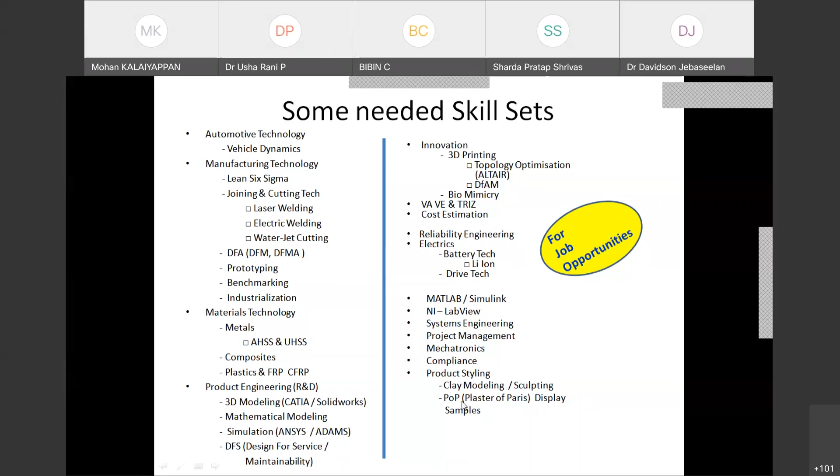These are available - okay, these are all recommended. Clay modeling also, plaster of Paris modeling of the car body, outer shape, and all that.

And any engineer should be multidisciplined, multi-physics, capable of handling multi-physics analysis, should be multi-skilled as well as multitasking - a multidisciplined approach. Electronic, mechanical, all engineers should combine software, coding, mass production, manufacturing engineers - everybody.

Basically every mechanical engineer should be about 20% electrical engineer, electronic engineer, and 30% software engineer. Likewise, an electrical engineer should be only 50% electrical engineer, 20% mechanical, and 30% software engineer. That is what's called multi-discipline or multi-skilled.

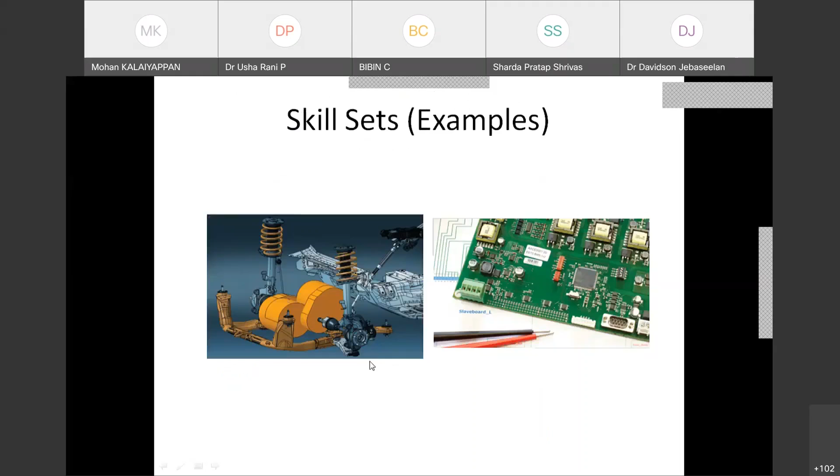And drivetrain architecture - this you can see, inductive charging. These are all very good opportunities for students. And for skill sets, we have shown some model of a digital mockup, digital twin.

And yeah, this is a company which started as a brake pipes manufacturer, based in Germany. Now they are giving modular frames for building your own electric vehicles. This is a parallel - TI Cycles India is going through exactly the same history of evolution. We hope they will probably make EV chassis available for others to come buy and build their own electric vehicles, because whatever this company, Benteler Germany, did, these people are also doing.

So they're also now investing in the electric vehicle market. It's a Murugappa Group company, TI Cycles India.

More charging stations are needed - state governments should work together. There's uncertainty about charging standards and protocols, and fast development of electric motors is required, along with power electronics and vehicle controls. We've seen options for alternative battery chemistry because raw materials are being controlled by an unfriendly country, and raw material shortage is going to come - lithium is going to be a huge shortage. So we don't have time for this.

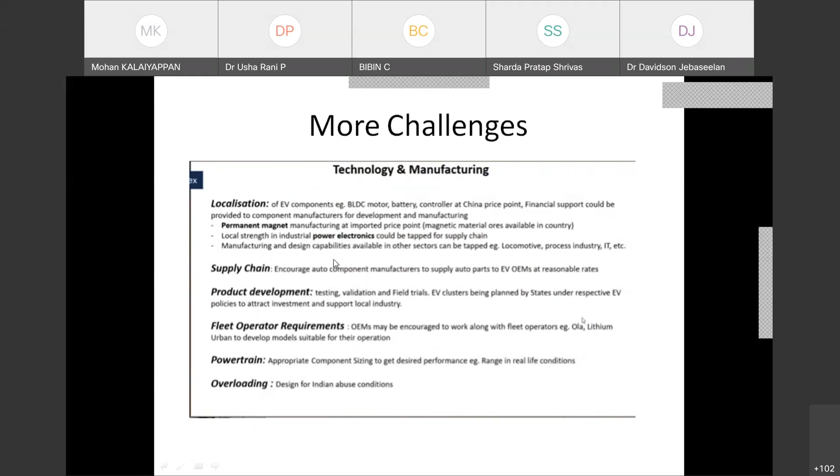Present scenario - research on fuel cell is happening. Okay, we will go into this. GM, I think we have seen - yeah, 19 vehicles are made using 11 vehicle modular components.

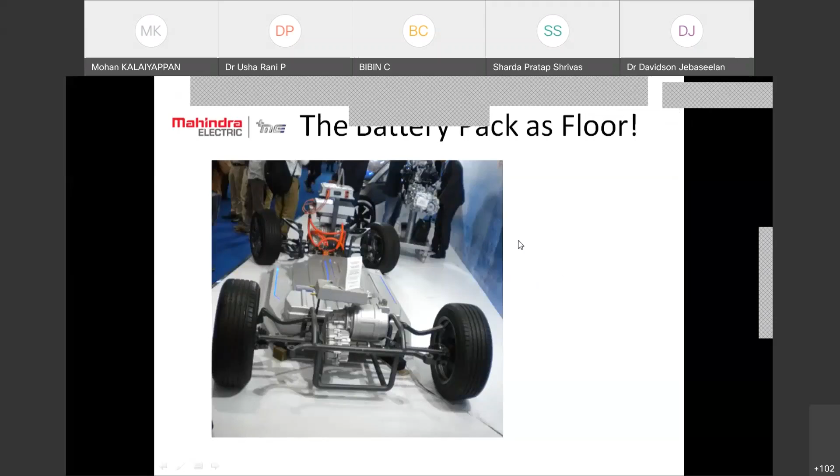Battery as a floor, or batteries in the floor. This Mahindra electric vehicle is again a skateboard concept, range extended electric vehicle. This REE is a foreign company; both are partnering to make electric vehicles in India. Mahindra Electric is a separate company now. Battery pack as floor, it's a skateboard concept.

It's called a skateboard concept. Siemens and some other companies are forming a collaboration to make it. Ford has made cars since 1907, but Tesla came and disrupted it because of these modular and other concepts.

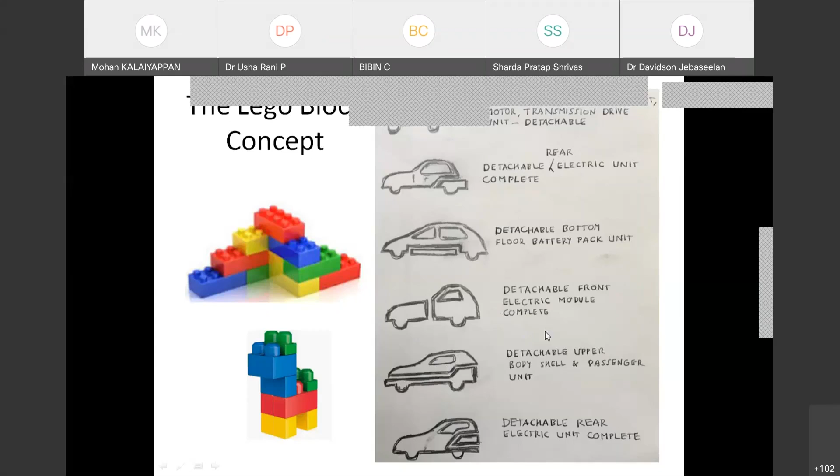So what are the modular concepts? This is a transmission drive. Sorry, this drop down menu is blocking it. You can make it modular. The battery portion can be removed from the bottom, or maybe as a frontal portion, or the bottommost compartment; the passenger compartment can be removable. Like a Lego block concept, you can use modular design for swapping or whatever is concerned. Opel GM hydrogen fuel cell car is using that.

So far we have never seen passenger cars like this, but this is made as a module. The passenger compartment comes from a different place and then gets assembled. That's how we can make more cars using the same common components. It's called a modular design.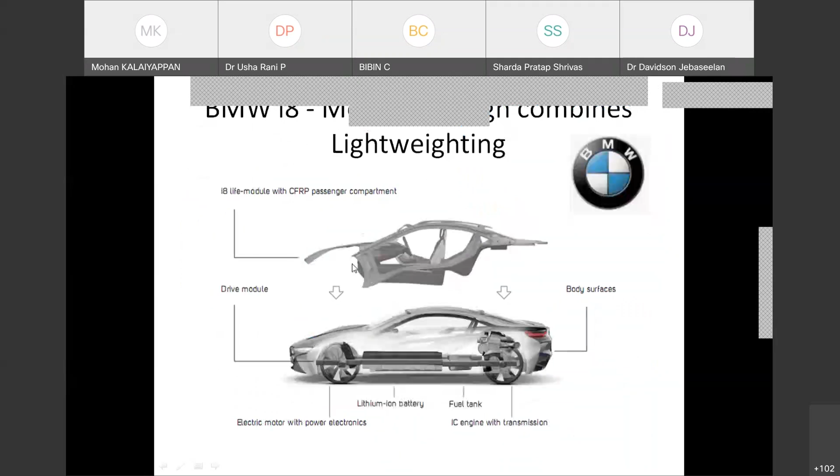So BMW i3, see here, the body is kept on that. If you change this body, it becomes another car. Same bottom portion, it becomes the i8. And Ford electric vehicle: battery swap, fixed battery, battery swap, flash charging, electric highway, wireless inductive power transfer, fuel cell.

This is a fixed battery subsystem functional block diagram. Ashok Leyland has successfully made battery swapping work for their city buses. It takes about 600 kilogram battery to be swapped in about 10 minutes. They have successfully done that. You can see that in the sideways view, and this is another photograph.

They're saying every 10 kilometers it should be swapped, meaning for 10 kilometers only it will run. The swapping time should be 2 minutes, but currently it is about 10 minutes. They are trying to reach 2 minutes. This is the time everybody spends at the petrol bunk for filling petrol or diesel. So they're benchmarking against the current practice.

Very interesting, India is a key proponent. When India advocated battery swapping as a key technology changer, other countries were laughing at it. They said you should increase range per charge and invest in charging infrastructure. But now even advanced countries like UK are seriously considering battery swap for popularizing electric vehicles. Very interesting, India's ideas are being accepted throughout the world. India is usually conservative when it comes to ideas, but now this is going to become a norm in various other countries.

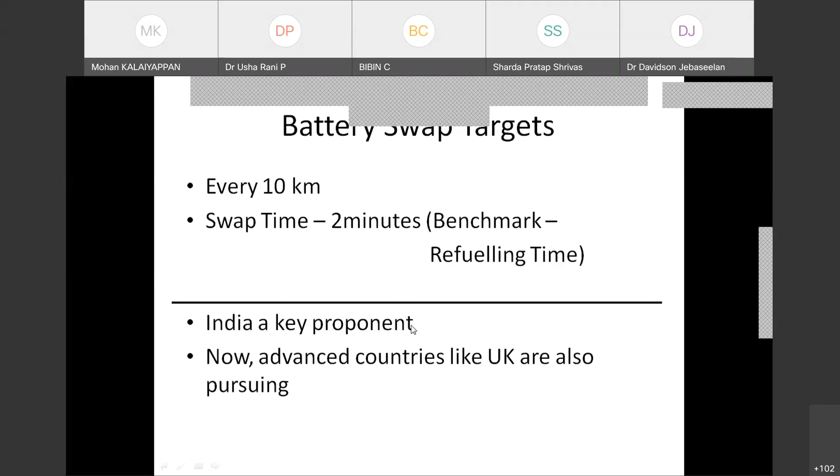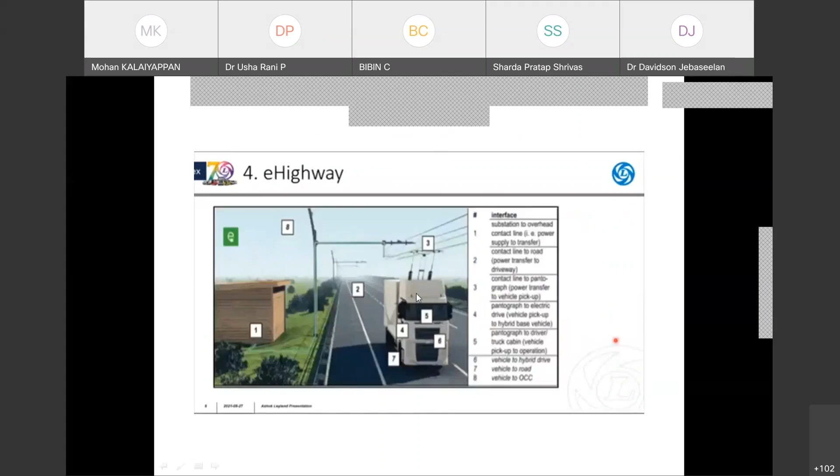So Leyland e-bus, ample swap station. This is fast charging; it just touches somewhere and charges. The electric highway we saw yesterday: e-highway, wireless bus power transfer from the bottom. When the bus stops at a bus stop, it charges from the bottom without touching anything, using an inductive coil. This is a system diagram, functional block diagram.

The fuel cell vehicles, fuel cell electric vehicle, and this is a conclusion comparing all of that: upfront cost, range anxiety for all these 6 options, time to charge. You can see all of these when I share the slides.

This is a battery swap for a scooter, as seen in Britain. The charging stations are there, and under the seat of the scooter you have to open the lid, take out the battery, go plug it in, and it will automatically start charging. You can remove already charged batteries and put them in your scooter.

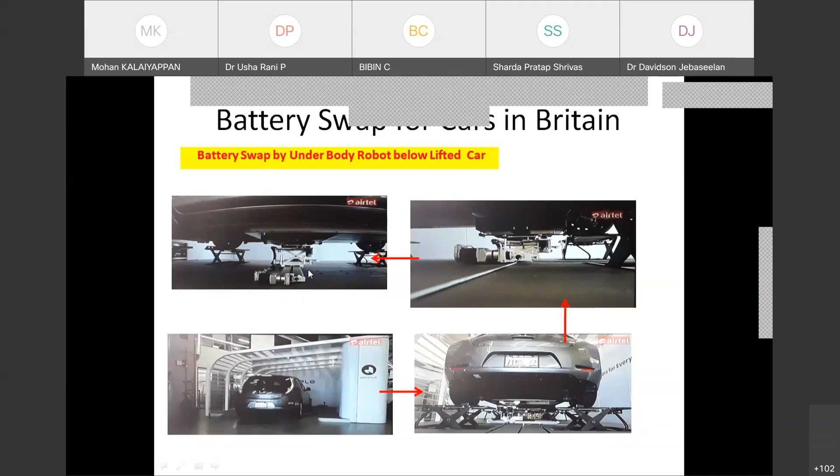And for cars in Britain, there is a scissors platform which lifts all 4 wheels, and a crawler robot which goes below the car, removes the battery, and fits the new charged battery. It's a battery swap. This is what is called a bottom module, or removable bottom battery swap at the bottom of the car. These are close-up photos.

For electrification, you can use brake hybridization, brake energy recovery by means of intelligent alternator control also. The charging alternator can also be used as a brake energy recovery mechanism.

And this is for reliability testing. You have to use highly accelerated life testing, or multiple environment overstress test as per MIL standard 810. It can use design of experiments versus highly accelerated life test, combined environment reliability test; statistical reliability and safety methodologies are used, FRACAS and multiple environment overstress test. It's also called the thunder and lightning test, with humidity cycling. All these factors are loaded as stressors.

Temperature cycling, voltage cycling, transients like load dump, field decay, sometimes vibration, dust also will be done at the same time. So about 5 years lifespan can be simulated in about a week or 10 days. It will tell you what this vehicle or battery system will go through in 5 years. I'm giving this as an example. These are called accelerated life testing.

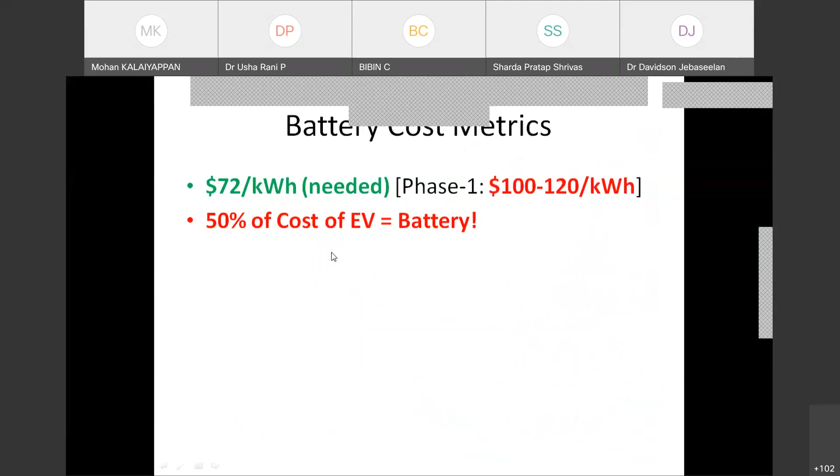Battery cost metrics: $72 per kilowatt hour is needed. In phase one it is 100 to 120 kilowatt hour. First go to 100, 120 in phase one, then come down to 72. 50% of the cost of an EV is the battery. So energy density is another important parameter, like 100 watt hours per liter, 250 watt hours per liter.

Lead acid is 100 watt hours per liter and lithium ion is 250 watt hours per liter. That is why lithium ion batteries are more favored for electric vehicles, otherwise half of the car would be filled only with lead acid batteries. So these are very important, 100 kilowatt, yeah, this is what is there.

Various charging standards, these are charging plug standards: Tesla supercharger, CHAdeMO, and CCS combo. I think this is adopted by China also, or this is evolved by China, I don't know. So these are all the various types of charging standards.

Whereas nationwide standardization is absent in India, it is actually crippling the industry. Advantages of economies of scale are being fully lost. Every manufacturer is trying to come out with their own type of battery which cannot be swapped with any other car manufacturer's car. So government bodies like ARAI, CII, Automotive Components Manufacturers Association, so many organizations and societies are there. They must all get together and enforce on the government, and the government should enforce on the manufacturers to go for a common standard: charging plug, charging voltage, kilowatt, battery size, and various things.

This lack of national standards in India is giving advantage to countries like China and Japan, who are supplying all these systems like plugs and standards. So forex outflow is there to these countries, probably as royalty.

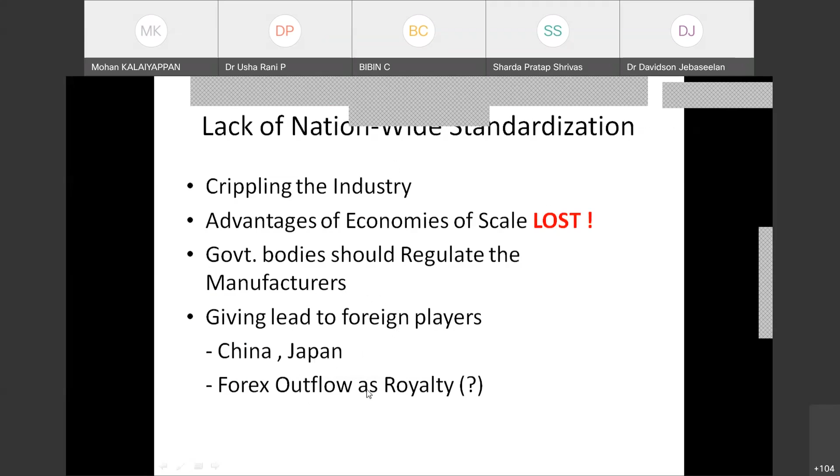MTTF should be increased. Regenerative range increase by regenerative braking, drag coefficient reduction, lightweighting, battery swap. Battery swap is basically horse relay carriage type, borrowed from the old horse carriages concept.

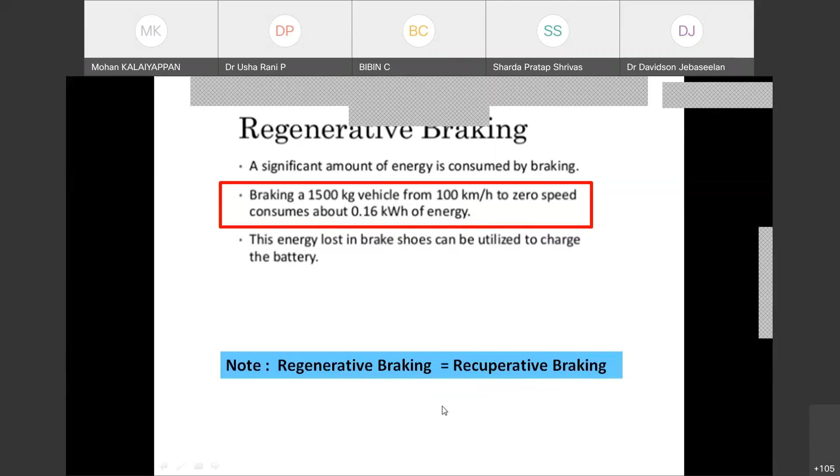And roof solar panel. So regenerative braking: braking a 1500 kilogram gross vehicle weight vehicle from 100 kilometers per hour to zero speed consumes about 0.16 kilowatt hour of energy. It goes to waste as heat and frictional material debris falling on the road. So why not use it? That's what led to the regenerative braking concept. These are various concepts, like the kinetic energy recovery system, and you can go through them.

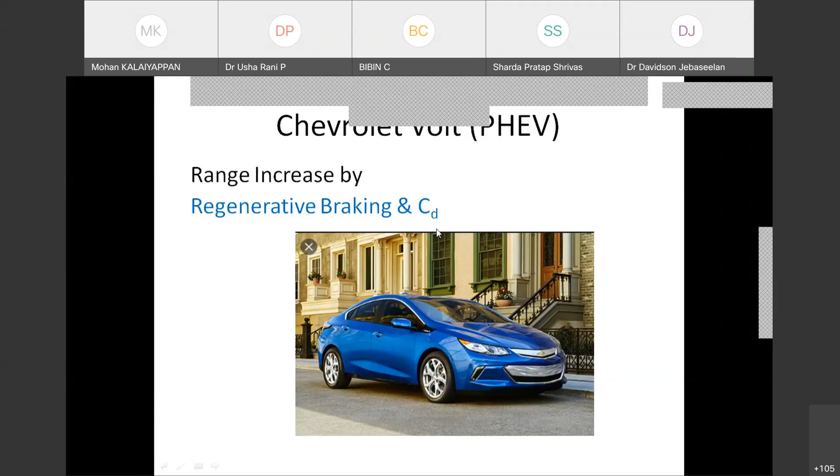Chevrolet Volt, a famous plug-in hybrid electric vehicle, had its range increased by regenerative braking and streamlining the car with coefficient of drag. So there are various companies.

Tata Motors is also supplying to others, trying to assemble and manufacture electric vehicles. Benteler, Bosch, trying to sell in India. Lucas TVS, Trontac, EMF Innovations in Coimbatore for two-wheelers and three-wheelers. AVL Germany also. Ziptron is a battery pack, a floor battery pack, which can be purchased from Tata and used for your own electric vehicles. These are all the specifications: IP67 and fully waterproof. Please go through them later.

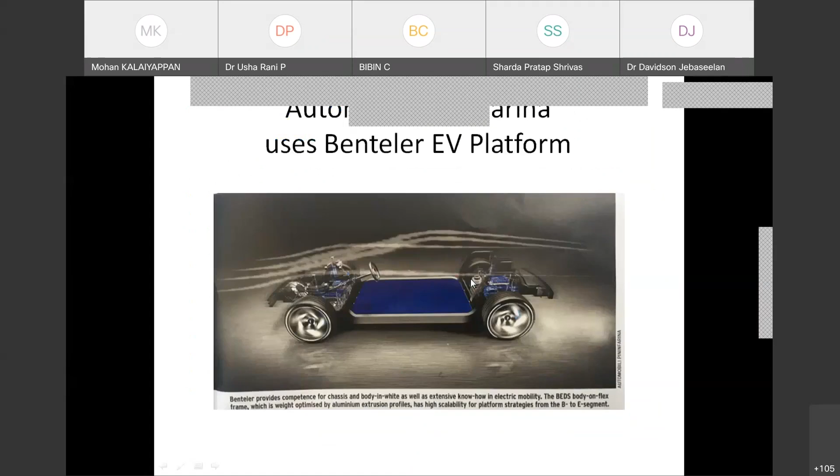Benteler is making something very interesting, I think they are giving the whole frame itself, made in Germany. It's used in the Pininfarina vehicle. This is a vehicle made from that space frame. Can you believe it?

Lucas TVS is one of the oldest automotive electricals companies, making all these generators, alternators, and drive motors for three-wheeler traction motors. They are collaborating with Electrobit, which I believe is a Belgium company, one of the electric vehicle leaders. So Lucas TVS is finally gearing up to take on the market.

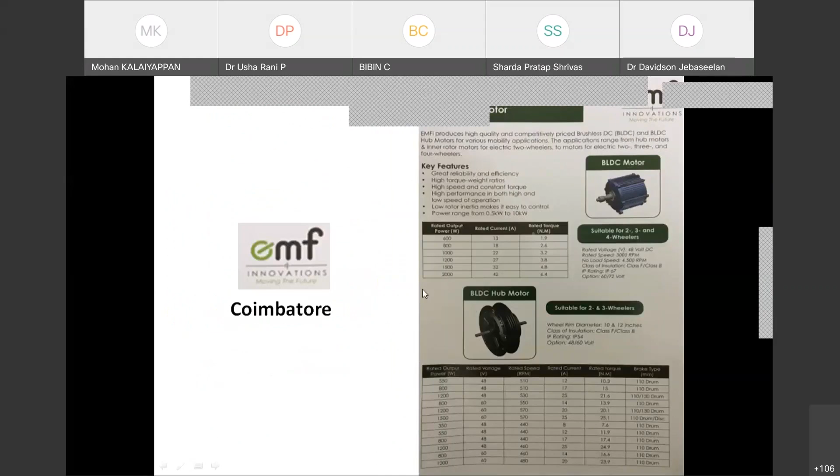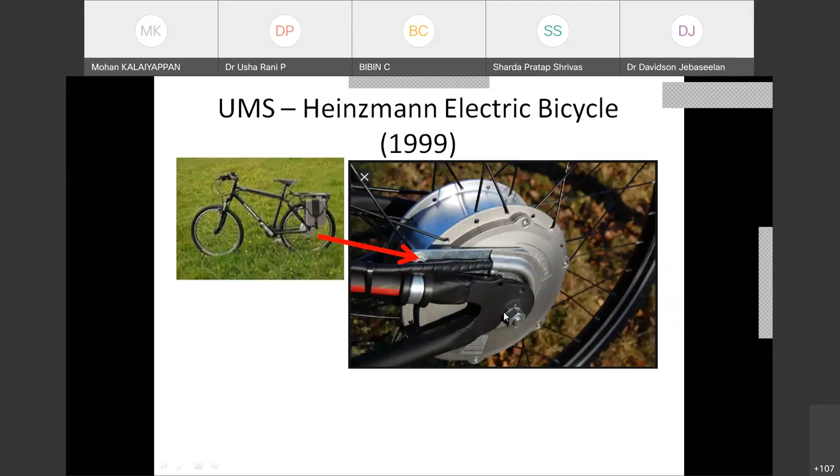And this is Trontac batteries. This is EMF Coimbatore. This is a Heinzmann hub motor, a wheel hub motor. Heinzmann supplies hub motors and huge equipment for very big applications, also very high torque levels. This is a hub motor which was fitted in a GD Naidu concern prototype bicycle in 1999. It's a Heinzmann hub motor. The hub is here, and the complete electric drive is here. So this is how the bike was made.

So we have engineers trying to look for career opportunities. You will have to learn software like Altair - HyperWorks, HyperCrash, HyperView. You have OptiStruct, that is for topology optimization using lattice structures and other methods, and various things are there.

We don't have time here. Radioss is there. Data analytics software also is available, called Altair Knowledge Works. It's color coded, you can see on the websites.

Design for additive manufacturing software is also available. Simufact additive, this is from Hexagon MSC Software, along with ANSYS which is also one of the oldest companies. MacNeal-Schwendler Corporation USA, and Digimat is a digital machine material library.

And PTC Creo 7.0, Altair Materialize - this is for printing. Essentially, they are useful for metal additive manufacturing also.

Thermomechanical COMSOL is basically a famous coupled analysis software. You can use it for the cooling of motor or cooling of the battery compartment, combined mechanical stress and electromagnetic flux analysis, things like that.

So these are famous - CFD is Fluent and Fluidyne. And there are various R&D organizations which are working on electric vehicle research. Probably you can contact them for joining.

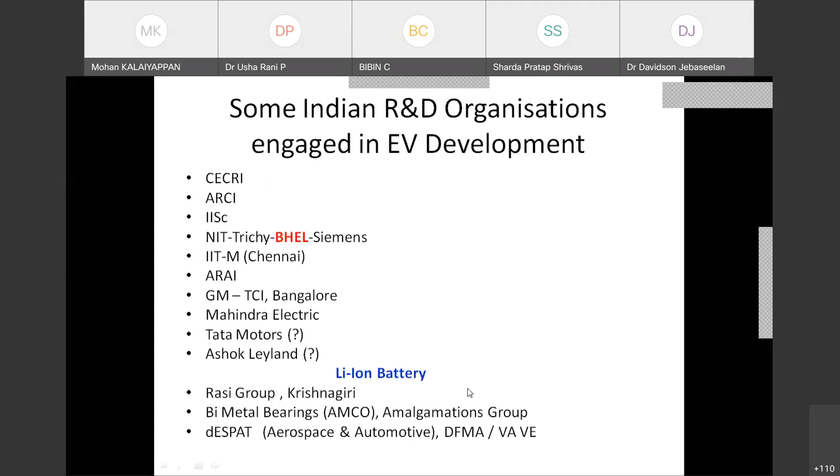Rasi Group has now become the Ola Group, in Krishnagiri. They are going to be the largest scooter factory in India, in Krishnagiri. This is what we talked about in the previous days.